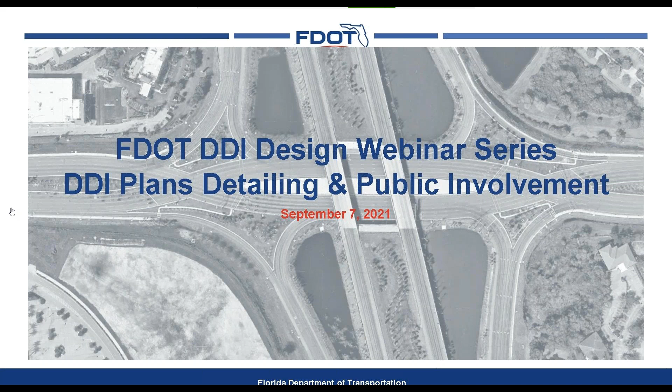As David said, this is the DDI webinar on plan detailing, public involvement, and constructability. We added that topic as well to this one because otherwise it was a little light. So as a reminder, this was a 6-part webinar series on pretty much all things DDI, starting with the overview, hitting geometric design, sign and pavement markings, traffic operations, multimodal accommodations. And today we're hitting the last one.

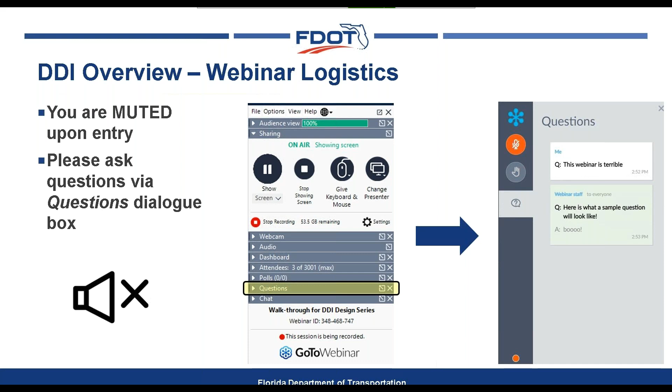So let's start with plan detailing. When you think about the final plans, what should the plans contain for a DDI? One of the biggest things we want to make sure we do is hopefully reduce that duplication of information. DDIs are an innovative solution, they're very atypical as far as alignments, atypical as far as cross sections, that sort of thing.

And so what we always try to do is, wherever we can, avoid duplication, because the problem with that is if you make a change late in the design when you have it showing up in multiple sheets and you forget or miss one of the sheets, that's where a contractor can come back at you and say, well, sheet X here showed this amount, this is what we bid. And that can be costly.

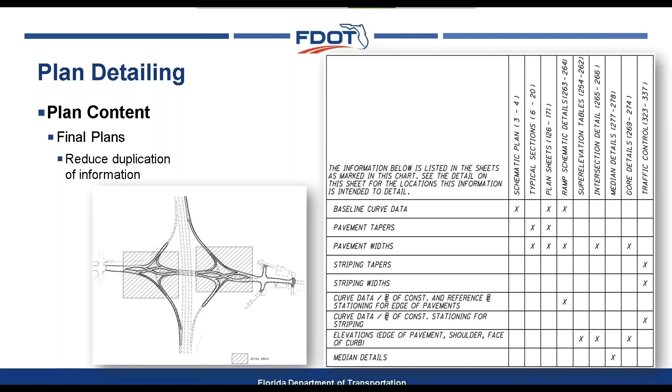Another thing we obviously want to do is reduce the confusion. Again, this is an innovative solution—there's not even a ton of contractors that have built these. So whatever information we can give to the contractor, to the review team, to make it easier for them to follow.

The other thing I'd recommend then is to establish a baseline for each direction, so eastbound and westbound, all the way through the interchange.

Now, the one thing this plan set did not do, that I would recommend, is change your stationing such that it's very obvious which stationing goes to which baseline. In this particular case, we started at about the same exact point—station 15 plus 00, for example, is pretty much in the same spot for all 3 baselines.

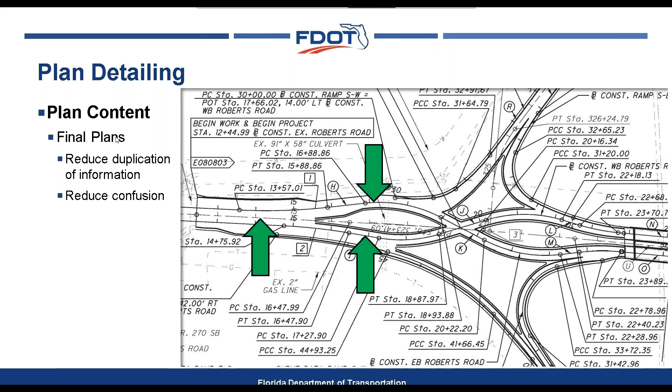So what you might want to do is start one of your baselines at 100, start your next one at 200, the next one at 300. Then it's pretty obvious as you're detailing plans—oh, I'm on station 312, that's got to be the eastbound direction or something to that effect. That's just something to help reduce confusion.

Another thing to remember when plan detailing is we establish cross sections through here. What you see are basically pattern lines established along the center line of right-of-way, that center alignment we established. The problem is if we establish cross sections on these pattern lines, we run into issues with a lot of skewed roadways, skewed grading, and it's really not as easy to detail or quantify.

So the recommendation would be, if you're showing cross sections, show them radial about the directions along each of the directions of travel—the baselines along each direction.

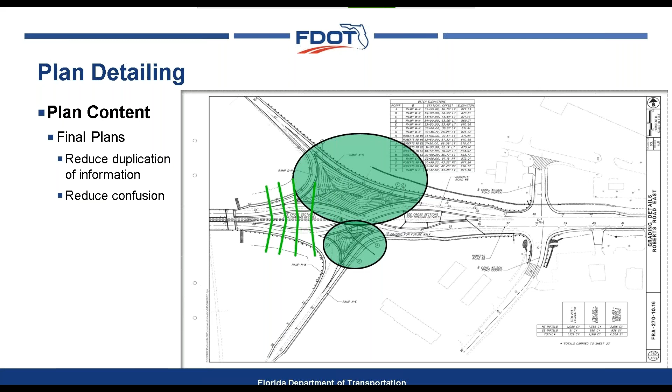Another area to focus on would be these interior areas where we'd potentially look at grading plans or something to that effect. Again, what we're trying to do is define more succinctly to the contractor what the grading looks like, what the cross slopes look like, what the ditch line looks like—that sort of thing. So just take a step back, think about what we're trying to detail and what's the best way to convey it.

Another area to look at when reducing confusion, and this is a good example, is even something as easy as your striping plan. With a DDI, your striping plan is a little challenging because typically your lanes are widening to accommodate truck turns, that extra pavement width.

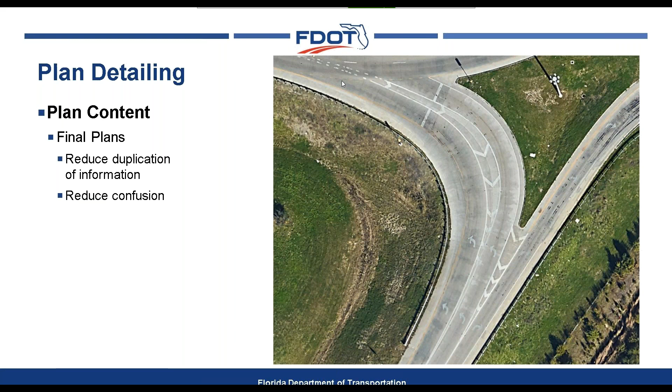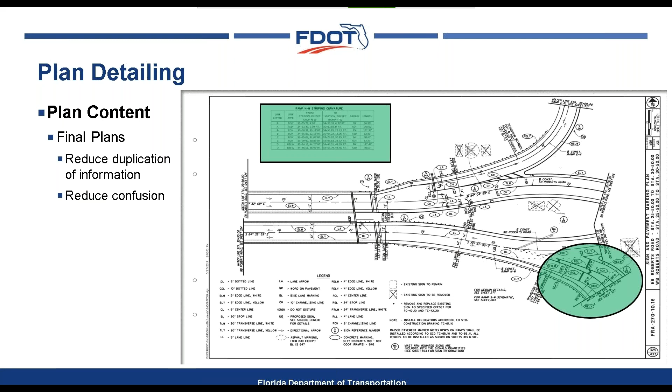So what we've done in the past is actually establish horizontal COGO elements, horizontal geometry, for each of the lane lines you see in that bottom right. Then we put a table up in the top left. This may be overkill a little bit, but it certainly does reduce confusion for the contractors trying to build it.

So again, just something potentially to think about, especially when you get into some of these really challenging ramps where you've got a lot of varying widths, tapers, and that sort of thing. This is pretty easy to do anyway.

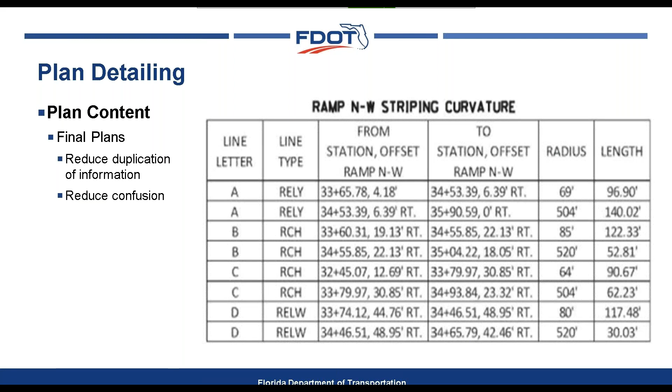Another thing we can do with OpenRoads Designer, our latest CAD software, is utilize proposed surfaces to convey grading and drainage. This interchange configuration, being unique, has a lot of warped pavement, coming to very acute intersections. Tracking how that looks from a pavement cross slope standpoint, as well as grading, is very important. Here's an example of what a grading plan could look like through the trumpet area of a DDI.

This is really designed to help the contractor. There's a finite spot where we want to put this low point, where we want this ditch, where we want to drain this thing, and where your drainage structure is. Establishing that using your software is a good strategy to ensure that what the contractor builds is what we wanted to have happen here.

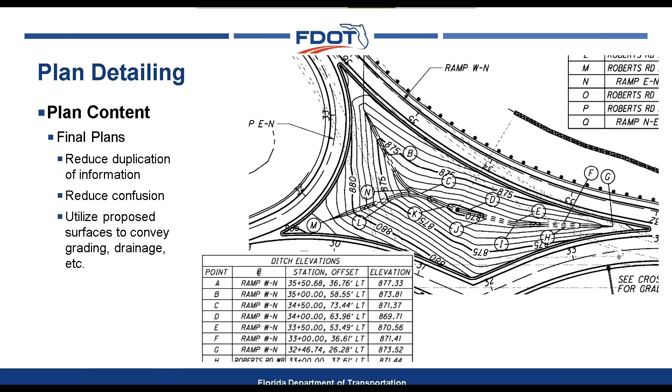This is another example of cutting your proposed surface across your pavement. Especially when you get to the crossovers, you're warping the pavement. There could be a vertical profile difference too, especially if it's a DDI going over a freeway. You're warping the pavement at the intersection, trying to get out through the approach or departure curvature. Setting that proposed surface is a real huge benefit to ensure you're getting positive drainage and that the drainage structures you're placing are in the right spot.

This is an example of a project where we screwed up initially, and luckily this didn't make it to the contractor. What you see in red with the X's is where we originally had the drainage structures and pipes for this crossover we were designing.

We later went back and built a proposed surface because something didn't quite smell right when we were looking at the drainage. As we got into it, we realized how much a couple of these shifted. That's simply because the pavement's being warped, the crown line's being shifted, the width's changing a bit, and we're getting closer and closer to that crossover. You can see the two drainage structures shifted quite a bit, and when they did, it changed the lengths of these pipes.

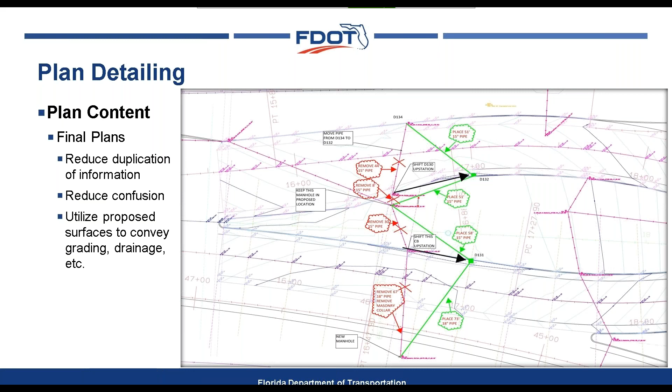Talking about crossover intersections, just a quick reminder - we covered this a little during the geometric design webinar - this is where those proposed surfaces really come in handy. There are a couple of options on how to address the cross slopes through the crossover intersection.

One way is to tabletop the crossover intersection like this. In this example, the approaches are all sloped in the direction you'd expect for a typical horizontal curve, and then rotated near flat through the intersection. Basically you create this single plane through the intersection.

Doing this allows us to drain the entire intersection to the west in this particular example, into this quadrant area over here. The reason why this works so well is because this was the DDI over, which meant we had that longitudinal profile grade to carry the drainage through the intersection - that's what the arrow to the left is doing. The tabletop in the intersection also provides a more comfortable ride for vehicles because they don't have to cross that crown line.

So doing this allows you to pick and choose which quadrant to best receive the drainage. You can choose this based on site constraints, ease of construction, that sort of thing, about where you want to place your drainage structures. So if you wanted to, you could tabletop this and drain it to the top, to the bottom, wherever. In this particular example, we drained it to the left.

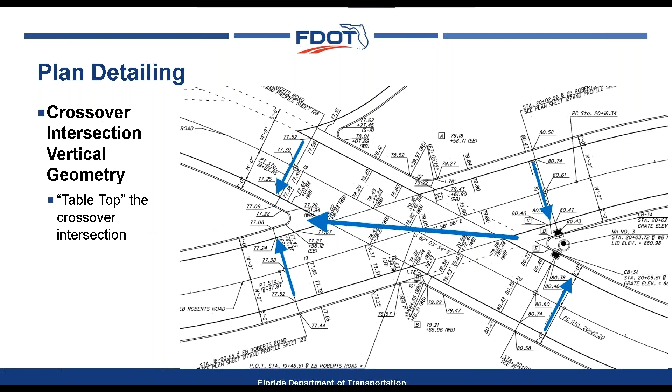Another strategy that's often used is establishing a crown line through the intersection and through the center. With this crown line, we could slope the approaches away from the crown line like this. This is commonly used when we have a DDI underpass and don't have a lot of longitudinal profile grade to carry the drainage to a specific quadrant. This strategy lends itself well to part width construction of the crossover intersection, with the phasing line along that dashed crown line, and it requires the driver to traverse the crown line through the intersection.

One thing to note, and something we see a lot as common practice: in order to establish the crown line through the intersection, the cross slopes for the curves approaching the intersection are established at an adverse crown. In other words, they're sloped away from the center of the curve, typically using no more than normal crown. While this may be counterintuitive, remember we're trying to establish slower speeds through this crossover intersection, which is a good traffic calming measure. As reviewers, remember these curves aren't designed as if along a freeway, but are purposeful in reducing speeds and establishing a good alignment for drivers through the crossover intersection.

Hey Brian, is this a good chance for a question break? Yes, sure.

Is there an advantage to flanking inlets and transitioning pavement slope? Yeah, there is. It's going to depend on how long the flat area is. If I'm understanding the question correctly, sometimes, especially when you're rotating the pavement at the same time the vertical is being adjusted, you may end up with a flat spot that's pretty long because of the flatter grades. So you may want to look at having a couple of inlets closer together, one right at the low spot, but then one fairly close on each side.

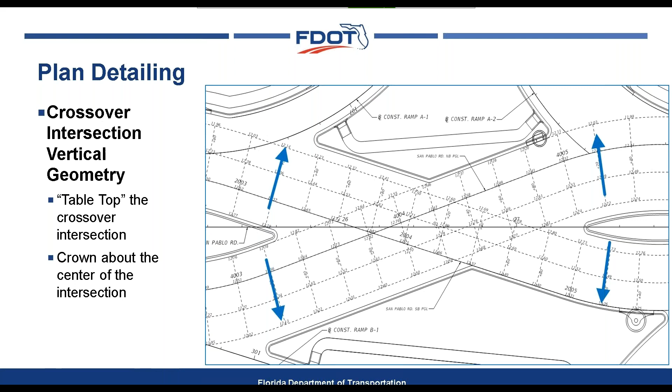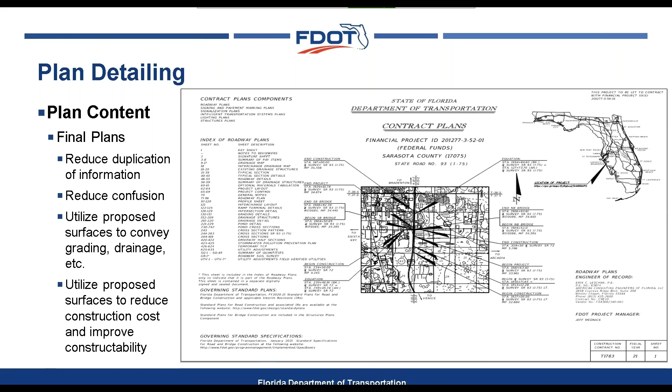Using one of these allows us to optimize the proposed profile in order to closely match the existing pavement and reduce the amount of full depth pavement reconstruction approaching the crossovers. We recognize that oftentimes the crossover intersections will most likely require full depth reconstruction. Whatever we can do to minimize the full depth reconstruction and maximize the cross slope correction pavement resurfacing outside of these crossovers will improve constructability. It's going to reduce construction duration and reduce construction cost.

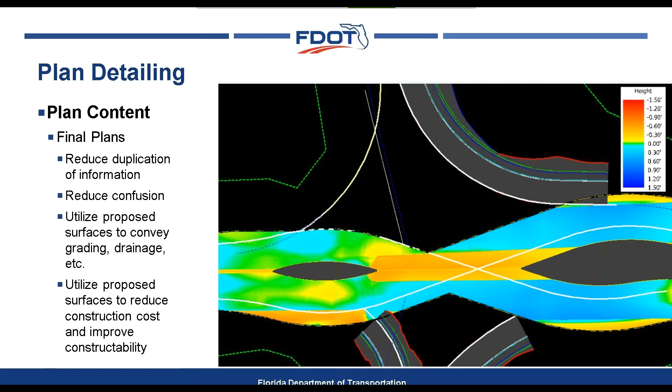I'll use this time to promote the DDI review process that FDOT Central Office utilizes. As DDIs are going through the internal design process for Florida, Central Office gets a chance to review them. We're looking for several items, but there are certain things we want to see as part of that review process.

One of them is the horizontal and vertical geometry of the DDI. We also want to see the truck turning exhibits, because one comment I always give if I don't see those is, are you sure you can turn the design vehicles established for this, especially on the dual rights or triple rights we've seen? So show us that, and make sure you read the FDOT developmental design criteria for DDIs, because there's a specific way we like to see the pavement widening as a result of the truck turns.

The traffic analysis, because we want to verify that we have the right number of lanes, especially through the interchange core, which is the area I call between the two crossovers. Because if that's wrong, adding another lane partway through design is a big change. So let's confirm the traffic analysis works.

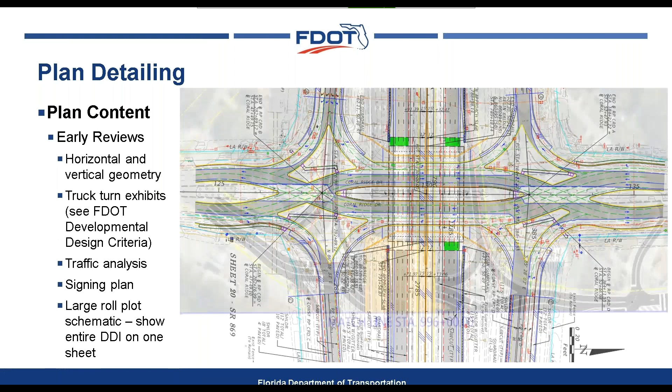That's kind of where showing a large roll plot schematic of the entire DDI on one sheet is very helpful. Even what you see on the screen right here would be great. It allows us to take that step back and see the whole DDI. Just be careful of where you set your match lines if you end up going to two sheets.

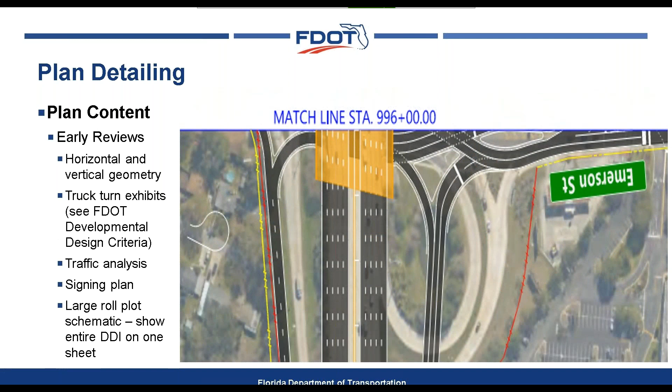Here's a great example of a DDI where we got to review it, and they put a match line literally through the heart of the DDI. Sheet one, sheet two. This became really challenging to review. I ended up having to do a little old school printing this off and taping it together so I could see the whole thing.

So those are part of the pieces that we definitely would like to see anytime we're doing a review.

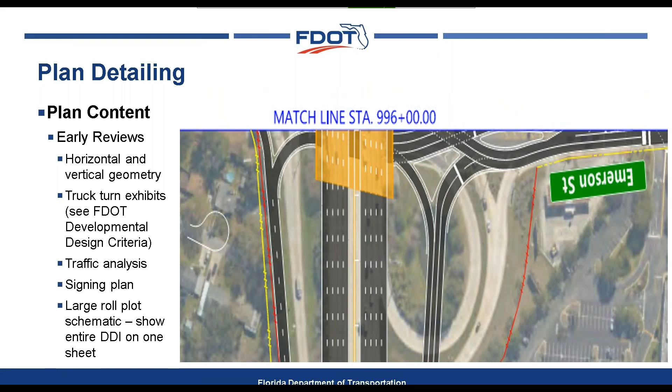David, I don't know if there's anything you wanted to add on the FDOT DDI review process. No, I think you covered it pretty well. Okay, I put you on the spot a little bit there. Cool, okay.

All right, so let's hit a little constructability. We talked about full depth pavement versus resurfacing, and really what we're trying to ease is not just the cost, but also the constructability. We talk about construction phasing, there are many options for maintaining traffic, and a lot of that is simply site specific.

One thing we recommend with our DDIs is to take the weekend before we flip the switch and turn it to a DDI officially, and close the interchange. That allows us to perform some signal testing, test the signal timing, look at the final pavement markings, that sort of thing. That goes a long way to making sure day one, when it's open, is functioning well, because it's something the drivers in the area just don't know a lot about.

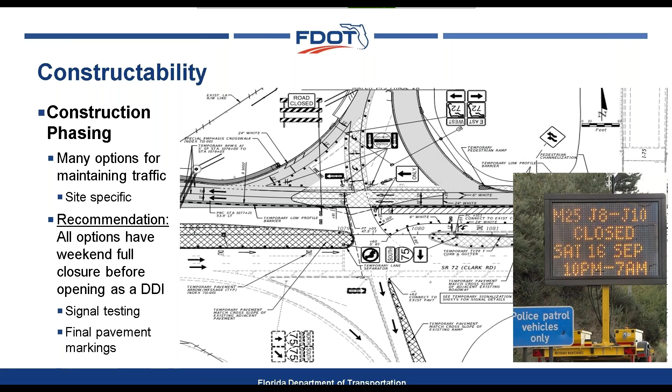So there are several questions to consider when developing our temporary traffic control plans. The first one I always like to ask is, can the interchange be closed? The corollary question would be, is there an appropriate detour available? One thing I'd definitely recommend is don't make a rash decision to say it can't be closed. Confirm with the local businesses and stakeholders before you decide that.

There are times where if you present the businesses in the area with the alternative—we can do this part width, we have to keep it open, we're going to maintain traffic through it, but you're probably going to experience significant traffic congestion and it's going to last 12 months of construction, or we can close it and get this built in 4 months—there are times where the business may say, as soon as construction starts, we're going to be routing our trucks and traffic around anyway, so go ahead and close it. That happened to us on a project and saved a considerable amount of cost. So just something to think about: when you're asking whether it can be closed, make sure you do your due diligence before you answer that.

The next question is whether the existing pavement will be reused or replaced. We've already touched on this a little bit—the difference between full depth and resurfacing is significant in how I handle my temporary traffic control. The duration, the lateral width I need, the timing, all that comes into play.

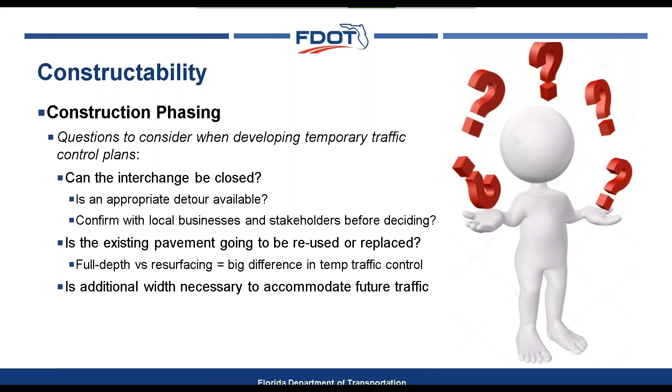And then, is additional width necessary to accommodate future traffic? Sometimes you get a DDI that is wider than the existing diamond, so that can potentially be used to your benefit. Those are things to just think about.

And then, when are the best times to switch traffic between the various stages of the project? Really it's a timing question in general. If you've got a school nearby, when should this be under construction? If you're shifting traffic in a high tourist area, maybe you try to do it at night, but you may have a tougher time depending on when it is. Being able to answer those questions will be very helpful.

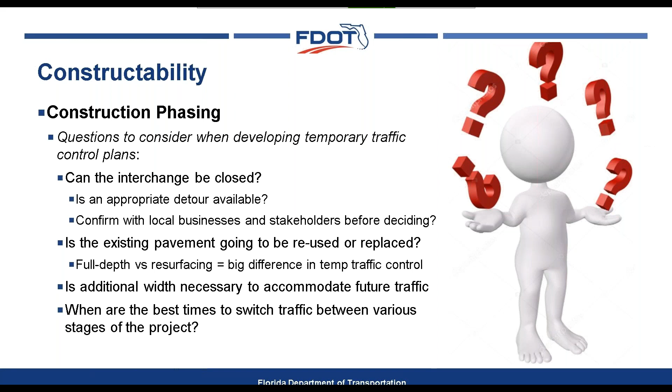Another option is offline construction, and this becomes very challenging simply because there are usually elevation and cross slope changes throughout the crossover areas. So it's not really that straightforward, but whatever you can do to maximize that offline construction, the better.

And then the other option is the part-width construction strategy. The challenge with this is often the number of lanes available to construct part width is too low. Let's say, for example, it's ultimately going to be a 6-lane DDI, and if we're building this part width, that means we only have 3 lanes available during construction. How do we allocate those 3 lanes? Likely we'd do 1 lane each direction with a short back-to-back left turn lane, when you've already got probably 2 lanes in each direction and full-length left turn lanes as a diamond—now you're going down to half that, and it's going to be gridlock, or oftentimes it will be.

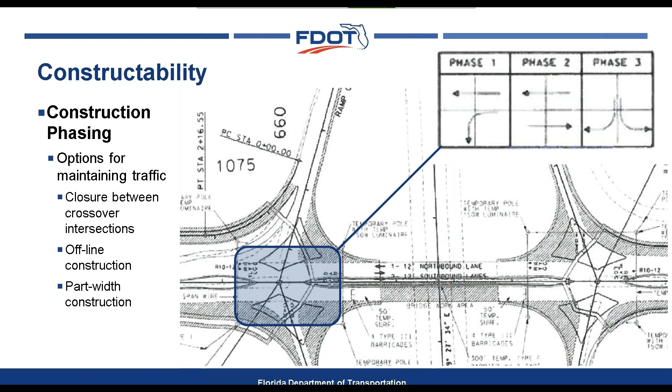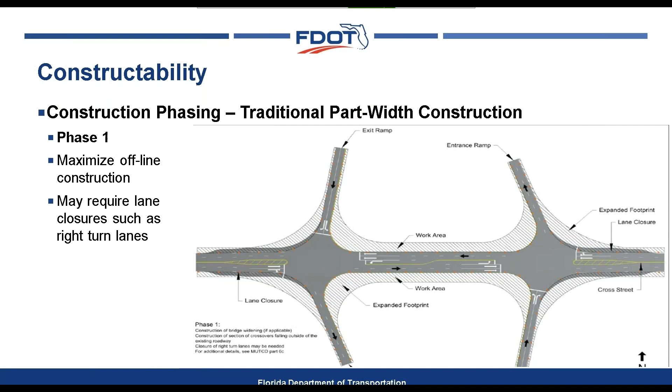And phase 3, then we're going to build the other half. Depending on the situation, if we're able to overbuild a portion of the first piece of construction, we may be able to add more lanes to this. But if we're overbuilding, we potentially could be looking at additional cost.

And then phase 4, we can shift that traffic to the outer edge to construct that center island. Perhaps this phase isn't needed if we can shift the traffic to one side with enough room to overbuild the other half, and we can get that center island within the DDI constructed as one of the earlier phases.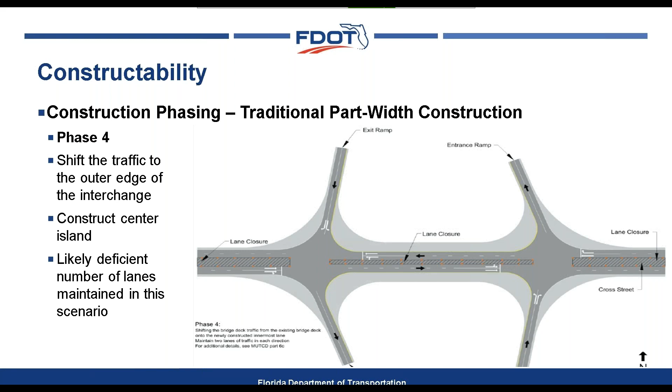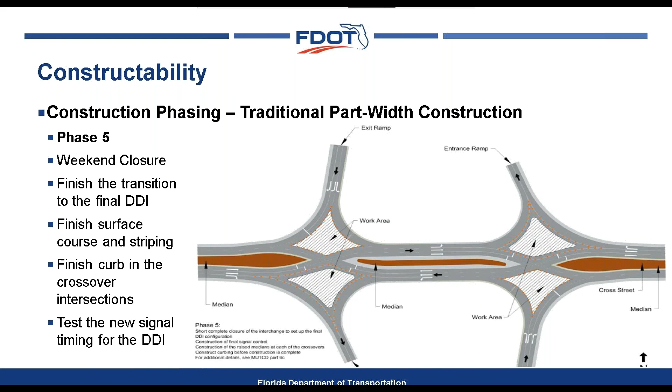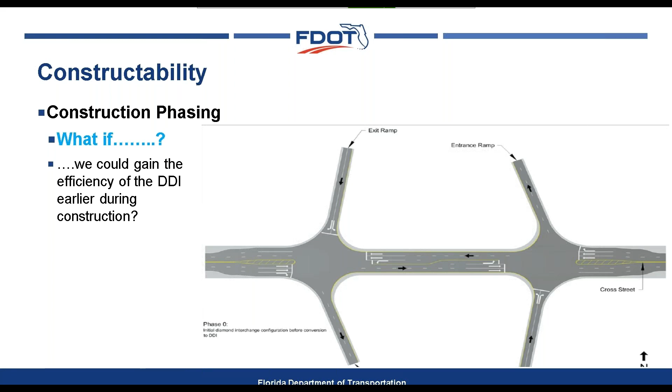But as you can see, doing a traditional phased construction leads to some challenges of how we're going to maintain traffic. So what if we could gain the efficiency of a DDI earlier during construction? What if we could reduce the number of traffic shifts during construction? Those become a real challenge, not just from a safety standpoint, but from a cost standpoint. And what if we could educate the drivers on how to drive a DDI earlier?

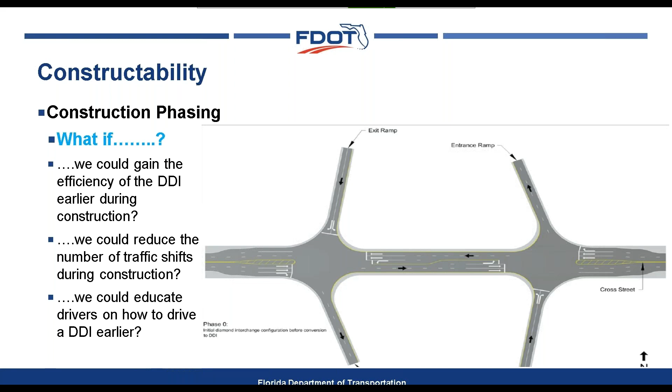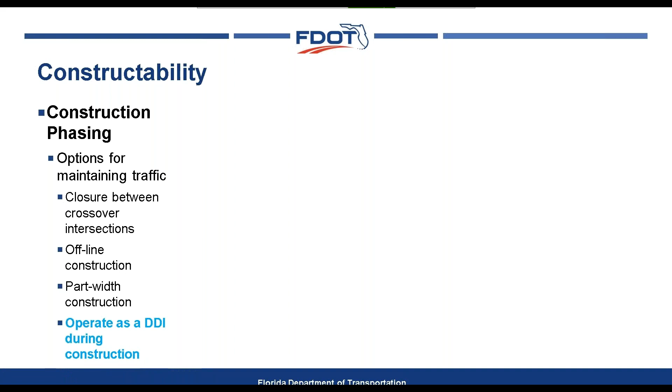So thinking like that a little bit, what if we operated as a DDI during construction? And so if we did that, I'm just going to show you a couple little images. This is actually a job that we did in Jacksonville, Florida. These first couple were just simply sketches and a couple little drawings that we put together just for us internally, to understand how this would work.

Especially the crossovers, because you're not using raised curb, but you're using barrels or traffic cones or something to that effect to delineate these crossover intersections. Utah DOT swears by this strategy. They have seen a lot of really good traffic operations during construction when they've used the DDI.

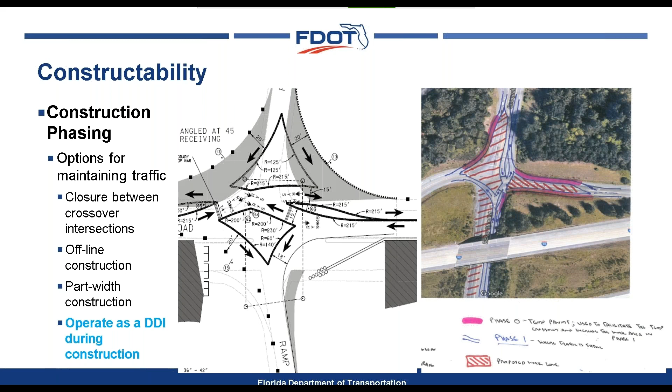So let's look at an example of what we did. Again, this is in Jacksonville, Florida. With north up, the interstate runs up and down in this image, but we actually took it out from the view for better clarity. So in this example, in the existing condition, we have 2 lanes in each direction, plus full length left turn lanes. So it's a 6-lane existing cross section.

So if we're looking at it now, phase 1, again, we're going to maximize that offline construction. In this particular example, if you remember that heat map example I showed you, now you can kind of see where that came from. We had to also construct some of the pavement in the median, which required us to narrow the lanes a little bit, add a little bit of temporary pavement. But again, phase 1, we're trying to disrupt the traffic as little as possible. In this particular drawing, the blue is the construction and the orange is the separator between the construction zone and the traffic, just to give you a little bit of context of what you're looking at.

Then we come in here in phase 2, and we do utilize phased construction. We construct the north half, that's what you see as blue, and we operate the DDI on the south half. So we're utilizing those efficiencies of the DDI, those free flow left turn lanes, those 2-phase signals, and we're getting a lot better operations at this location using it as a DDI.

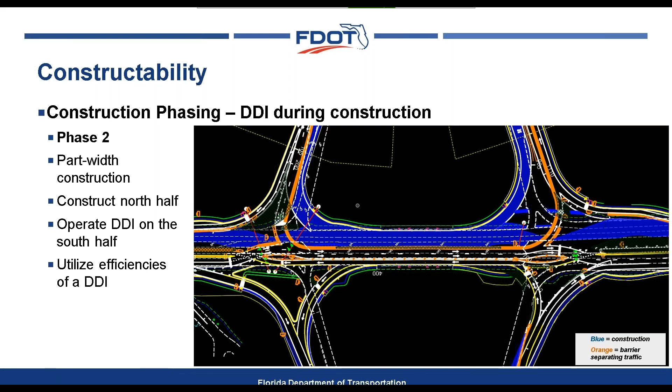A couple of things to think about. When you're looking to operate something as a DDI, pay attention to your signal foundations, the permanent ones, which we'll talk about in a little bit, but also your temporary signal poles. Ideally, what you'd like to do is place those temporary signal poles such that they work for all your phases, and that you can just slide the signal heads along the span wire as opposed to moving poles. So just be cognizant of where you can put the temporary signal poles, or if you can utilize some of the permanent locations, that would be great too.

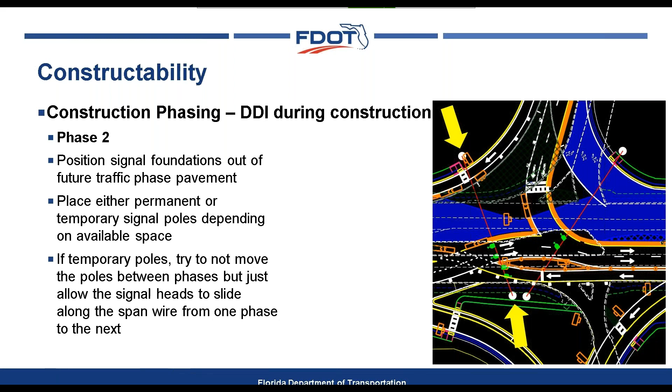So then phase 3, same thing, part-width construction. Now we're constructing the south half. We're operating the DDI on the north half, the pavement that we've already constructed.

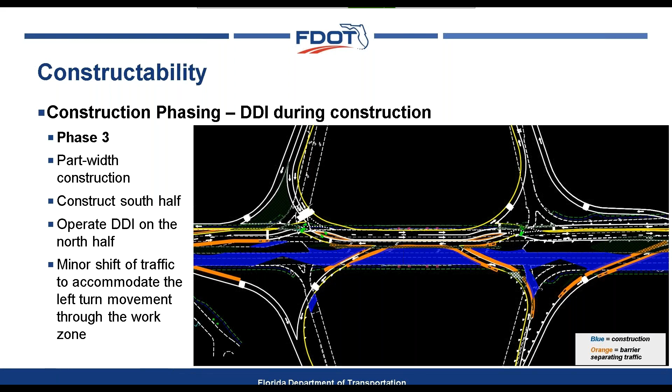I wanted to show real quick that, through all of these, minor lateral shifts of the traffic to accommodate the left turn movement through the work zone would need to be done. That's just something we have to be mindful of. You're trying to build that blue while you've got a ramp that cuts through there, so you may be shifting that ramp a little bit each way.

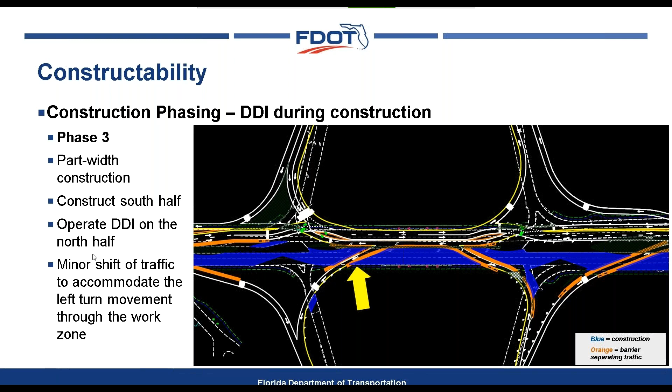And in phase 4, weekend closure, we finish that transition to the final DDI. We finish the surface course, the striping, and we test the signals.

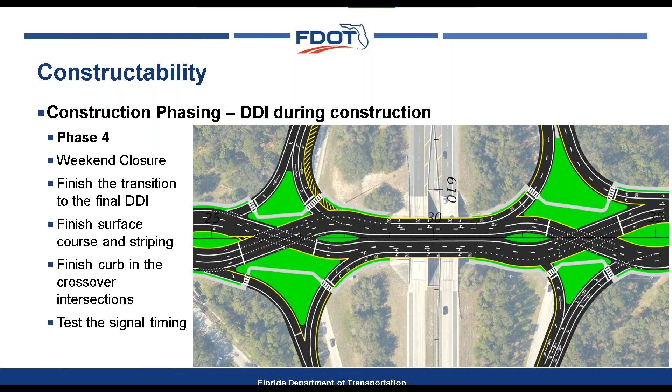The benefit of this simply is: one, better traffic operations; two, phased signals, free flow left turns. But you're reducing that learning curve to the drivers because they're navigating a DDI during construction, when speeds are typically lower anyway. People are kind of hypersensitive to what's going on because there's construction vehicles, there's orange barrels, and so you're essentially teaching them without them knowing it.

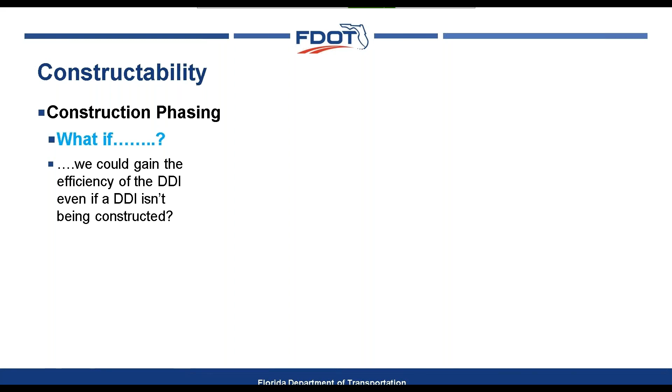So this gets me thinking a couple times: what if we could gain the efficiency of a DDI even if a DDI isn't being constructed? What if we could operate as a DDI for a bridge replacement project, for example? Is there anything stopping us from doing that?

We have several truck stops on the east side, a very large outlet mall, a ton of businesses on the west side, and a lot of traffic that funnels through this interchange. There are future plans to construct a new interchange about 2.5 miles to the south, which will alleviate a lot of burden at this interchange. So the client doesn't want to put a bunch of money at this location, but we need to redeck this bridge.

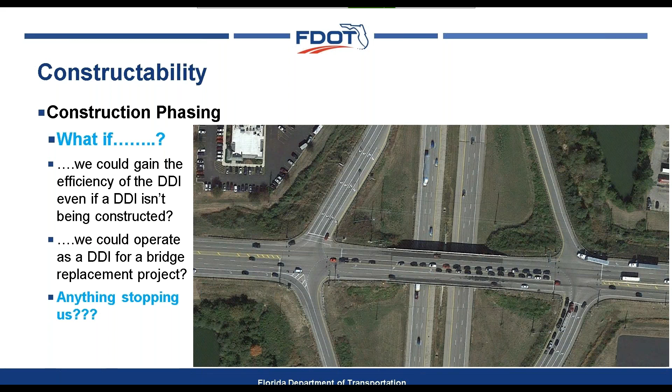The challenge with that is, redecking the bridge means you're taking the bridge out of commission. It's a diamond interchange. Existing condition: 2 through lanes each direction, back-to-back left turn lanes.

So if we look at potentially operating this as a DDI during construction, phase 1, we use the existing intersections to create the crossover intersections. Here it's a little bit easier because we're really not doing a lot of pavement work outside of the bridge, the bridge is just getting redecked. So I've got that width and area to establish the crossover intersections.

Again, if we can get away with less lanes, we could actually do this in 2 phases instead of 3. So here's my 3rd phase, where again I'm looking at constructing the northern third, and I'm putting all the traffic on the south half on the new deck.

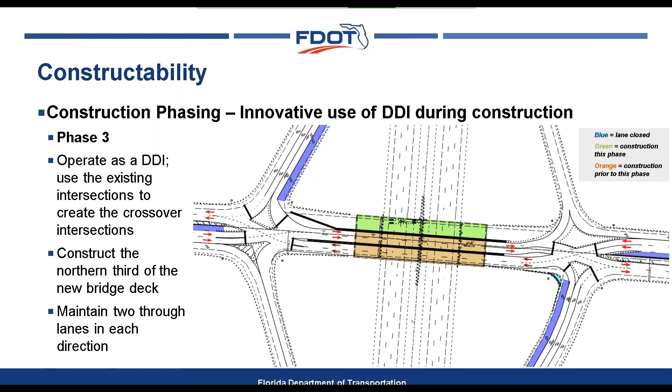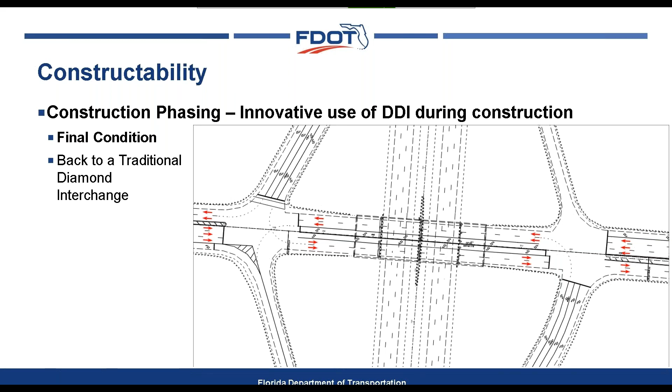And then the final condition, I go back to a traditional diamond interchange. So when I'm all done, the DDI is done. We've removed all the barrels, and we go back to just an existing diamond, same typical section, same cross section, same bridge. It's just a new deck.

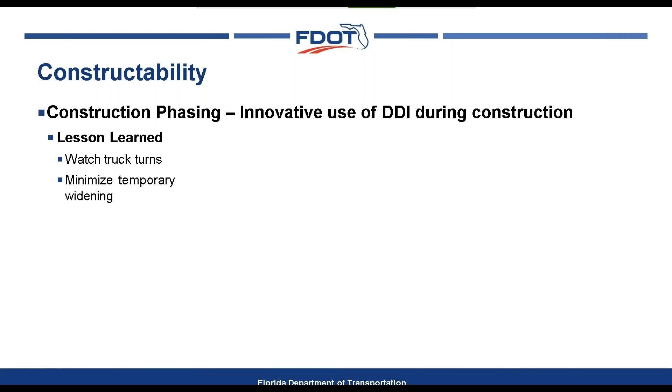We learned a few lessons on this job though. The first one is watch the truck turns. This is no different than any DDI design, but you definitely notice it when you're looking at something like this that's very innovative. So we wanted to minimize the temporary widening because on this particular job, remember, the client didn't want to put a lot of money into this project.

One of the other challenges when you do this: how do we message this project to the public when it operates better during construction than after, which is what happened on this particular job. So now the client's actually looking at this and saying, what would it take to make this a DDI permanently? So that's something you have to think about, but at least in this particular case, it worked really well.

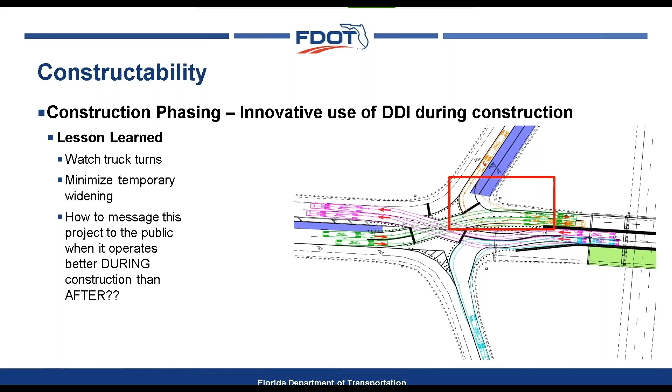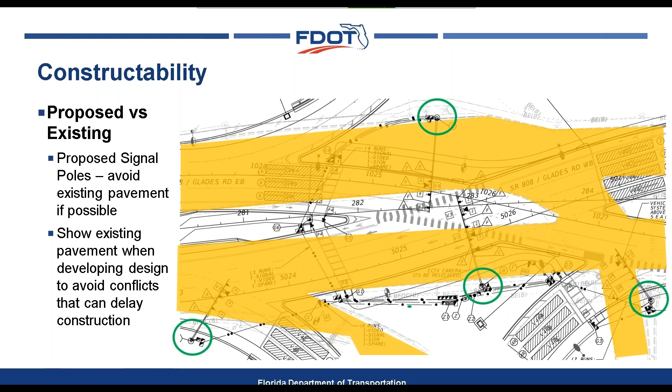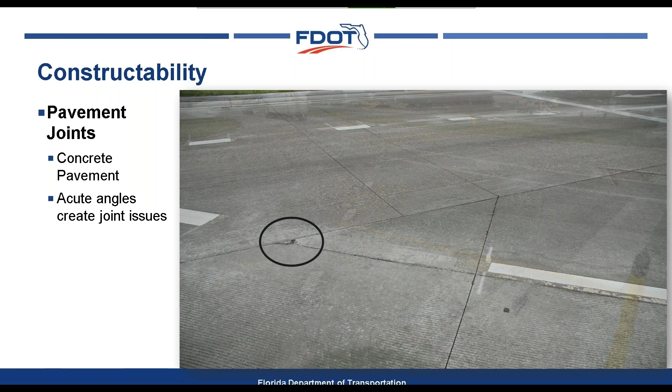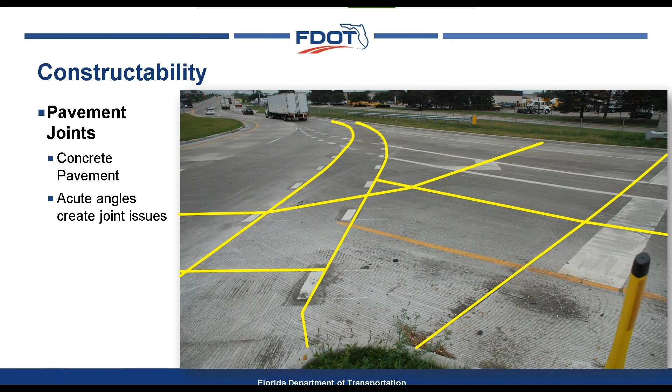And then this particular crossover intersection, hopefully you can see it, the yellow highlights are all of the pavement joint locations. The challenge you run into is these acute angles. When these pavement joints come to a triangular point, that becomes a real challenge. They don't stay together very well, especially with the angle that traffic is moving across them, since they're not perpendicular to these joints because of the acute angle of the intersection.

So just something to play with, something to think about. This is a challenging area as well.

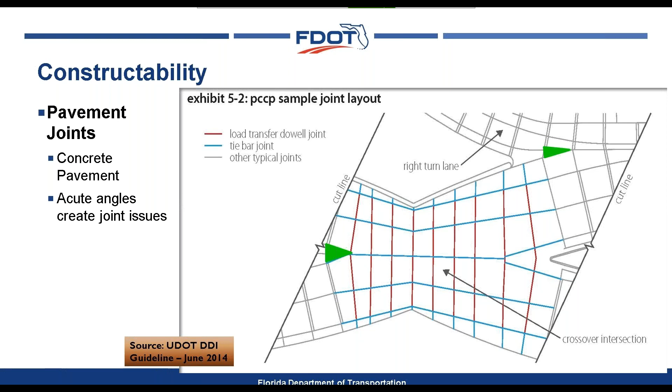David, do we have any questions? Yeah, we got some questions from the last session. One on signing: is it easy to get sign overload, and what can be done to mitigate excessive signing?

Yeah, that's a great question. I kind of liken this to a roundabout as well. You can have a lot of visual noise if you're not careful. There are definitely some good strategies. I think we covered this a bit during the signing and pavement marking webinar a couple sessions ago. But where can we maximize the effectiveness of the signs? Is there a place where we can put it all in one area rather than spread them out throughout the interchange? So there are definitely some strategies that can be done.

Okay, one more question: will the next gen plan sheet size help with the match lines? I think that was talking about when we had a match line running through the middle of the DDI. I think the answer to that is yes. Next gen, I think, there's more flexibility and you can get more of the project on a single sheet, I believe. I'm not an expert on the next gen.

Yeah, but you're absolutely right, the next gen plan sheets, they're looking at larger sheets now, and a little bit more content, or a little bit more coverage, which is always good. One of the things is, it may be a situation where if you've got a plan set that's got 50 scale plan sheets all the way through there, can you also create a roll plot, even if you have to scope that, but just for reviews, if you're not doing the next gen sheets at this time or something.

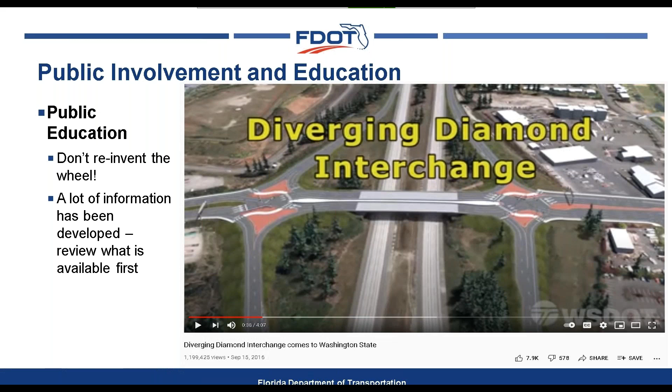Georgia put together a very proactive public outreach campaign for their first DDI. They had a lot of keys to success. They had one cool little catchphrase: can you DDI, arrive, crossover, drive. The media campaigns, the transparency to inform and educate the public. They had active and ongoing participation in town halls and meetings. They were very involved with engaging the stakeholders and the businesses to get their engagement, their buy-in, and their promotion. Those stakeholders became the champions for the project, and that partnership really was the key.

But that's just one example. There's several examples of this public education opportunity or strategy for DDIs. The nice thing too is there's so many now in the ground, and so many states doing even their first ones, that there's a lot of examples to choose from.

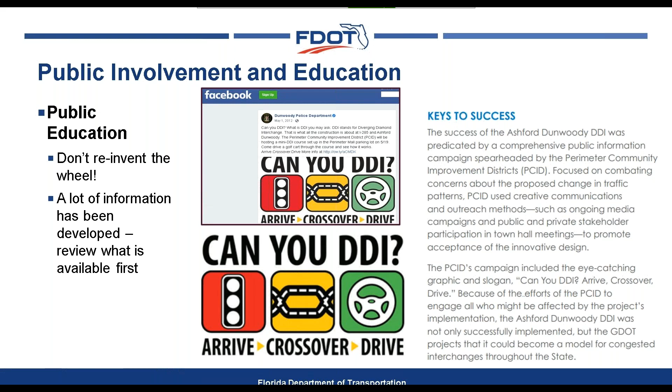And then we talk about public involvement. One of the things that we want to do is keep it simple. The public is not typically engineers or traffic analysts, even though everybody who has a driver's license thinks that they are a traffic analyst.

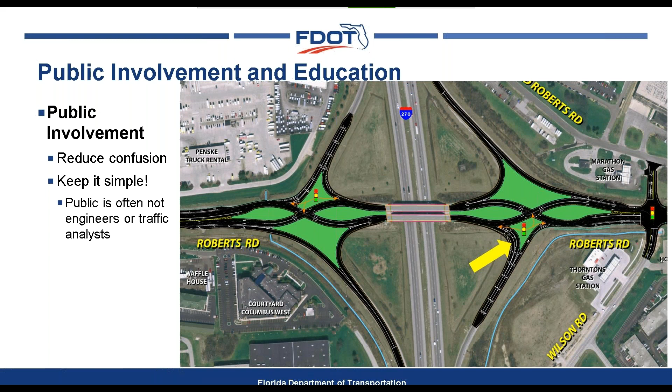It's hard trying to explain to her what she's probably going to see. Finally, partway through the explanation, seeing the blank stare she was giving me, I opened up my laptop, went into Google or YouTube, and pulled up a video. I showed her exactly that same location she pointed to, and what she could see - a driver's eye perspective of that particular location that had been created. It's on YouTube, so it didn't cost me any additional money to build models and that sort of thing.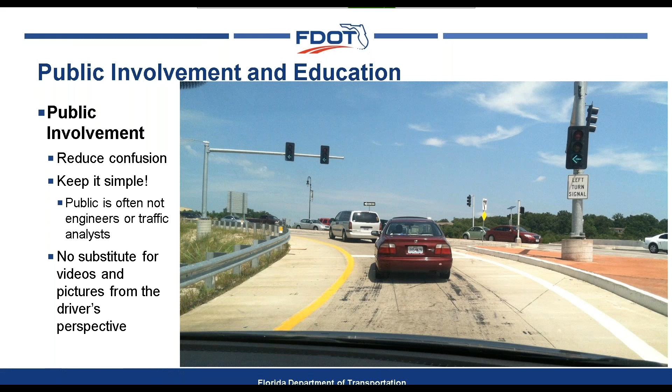As we're coming around, this shows that perspective again, showing the drivers on the right side - so you're on the left side of the road across the bridge - but it's intuitive, following the leader. A good design should not alarm the public. This is throwing it through the core of the DDI.

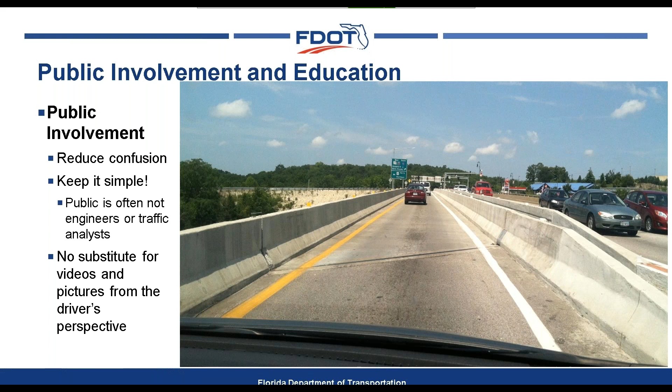And then there's VISSIM models, the animations, which are good to supplement some of these top-down images. These animations can show how traffic moves through the interchange, and it's something the public can often better understand.

This particular video, which I'm not going to play because we don't have a lot of time, shows not only the cars going through, but also pedestrians. This is a really nice way to convey how a pedestrian would travel, especially when you tell people that you're going to put a pedestrian down the middle of the DDI. Just saying that statement often adds a little bit of stress to their lives, thinking they have to walk in between cars. So you have to show them how safe that environment can feel, especially when you put that barrier separation and give them a wider path.

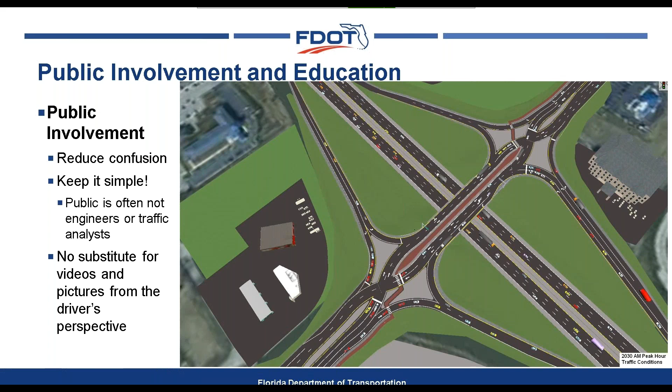When we're talking to the public, we want to focus on the advantages of the DDI. Sometimes getting into things like, this reduces the number of conflict points - that's something engineers like to talk about, but it's not always something the general public understands. So we want to make sure we're emphasizing increased safety and improved traffic flow, putting it in the perspective of: you can get through this interchange better.

You can get home quicker. If there are crashes, they're less severe, which means you can walk away from them. Those are the things we want to message - describing how they're functional for all vehicles and all modes of travel is a huge benefit, especially when talking about pedestrians and how they'll navigate through here, bicyclists, and that sort of thing, which we touched on two weeks ago in the multimodal piece.

When you're talking about cost savings, if you just say this interchange saves $3 million, people may be numb to that because they think, well, you're the state, you can afford it. But if you frame it as this gives us more money to apply to other congested corridors so you can continue to see improvement on your commute, that type of messaging goes a long way with the general public.

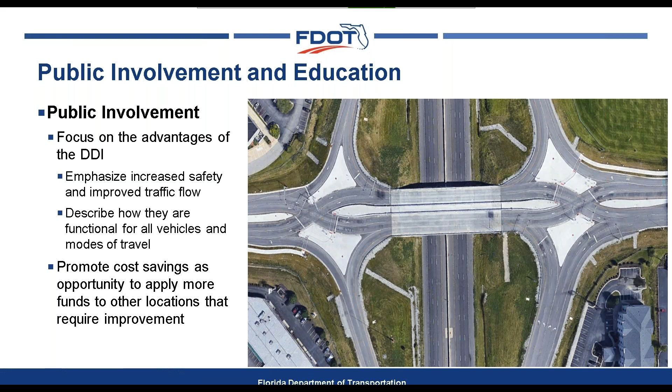So David, I don't know if now we want to open this up. We only have about 5 minutes left, but is there any other questions, or anything we can tag to the cleanup?

There's one really long question, I'll try to read it fast. We had to work on a DDI project where the existing interchange was a spread diamond. The district kept the existing off-ramps and on-ramps and created a DDI. This posed a problem by creating 2,000 feet of spacing between crossovers. Vehicles accelerate on the tangent sections of the DDI and cannot negotiate the crossover left-turning maneuvers. FHWA recommends the spacing between crossovers be 500 to 900 feet. Can this be enforced by the CO and included in the FDM? It helps the signal timing phasing as well.

So you want to talk a little bit about the spacing between the crossover intersections? Yeah, I think it's an accurate statement that the larger the DDI, sometimes the harder it is to manage speeds. They get through the crossover intersection and now you've introduced a very long tangent for them to accelerate in.